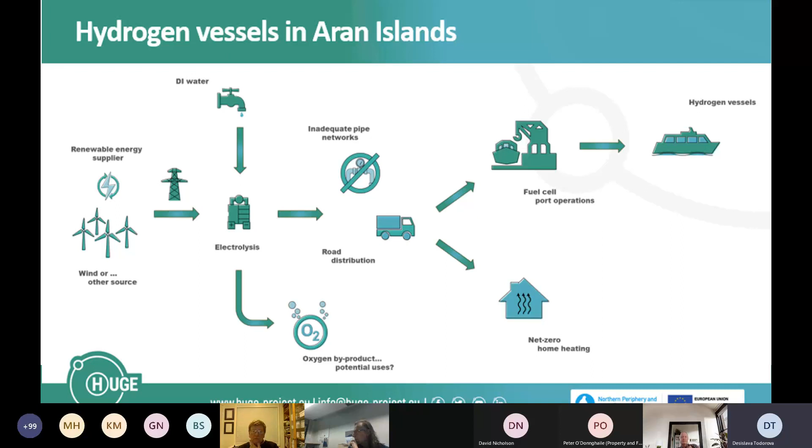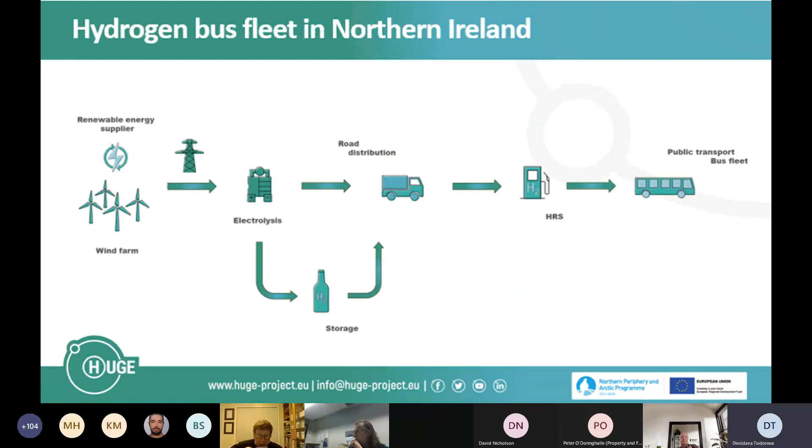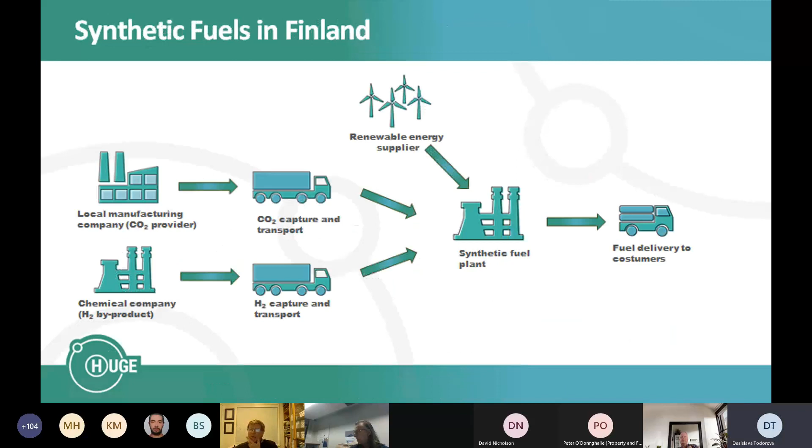So next, I'll just tell you a little bit about the different case studies that we're having in our respective partner regions. We have a case study around hydrogen vessels in the Aran Islands, off the coast of Galway in Ireland. We are exploring the possibility of a hydrogen truck network in Iceland. In Northern Ireland, we are looking at a hydrogen bus fleet, while in Scotland, we are looking into how to put hydrogen in public buildings across the Highlands and Islands, and more specifically the Highlands, working with the Highland Council. In Finland, we're looking into development of synthetic fuels through hydrogen. And in the Faroe Islands, we're looking for opportunity of developing maritime hydrogen and use of hydrogen in vessels near the shore.

Before we go forward with this, today's webinar is a product of the HUGE platform, which aims to increase the awareness of hydrogen as a viable option for a variety of end uses in the public infrastructure domain, be it housing, transport, or industry. We hope that our webinar series increases the readiness to invest in hydrogen solutions by raising awareness of the benefits that can be delivered by employing a hydrogen economy. At the end of today's webinar, we will present you with an output from the T2, the hydrogen hotspot map.

But before that, we have 3 excellent speakers that will give us an insight of what is happening in Scotland in terms of hydrogen development.

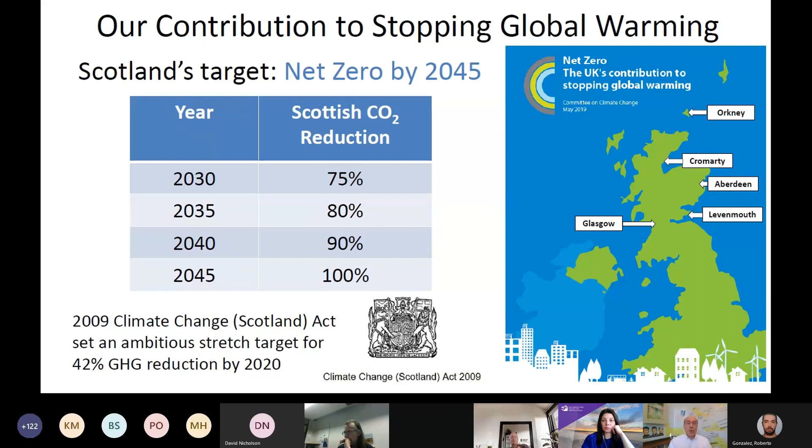They're on the chart here, just on the left. There was a 2020 target, which was for 56% greenhouse gas reduction. Didn't quite hit it. I think it's 52%, but still a massive reduction from the 1990 levels. But the next targets are going to be even more taxing. The 2030 target for a 75% reduction in greenhouse gas emissions is one of the most ambitious I know of. But it's also critical because to achieve the net zero target, we have to deliver the interim targets as well. Next slide, please.

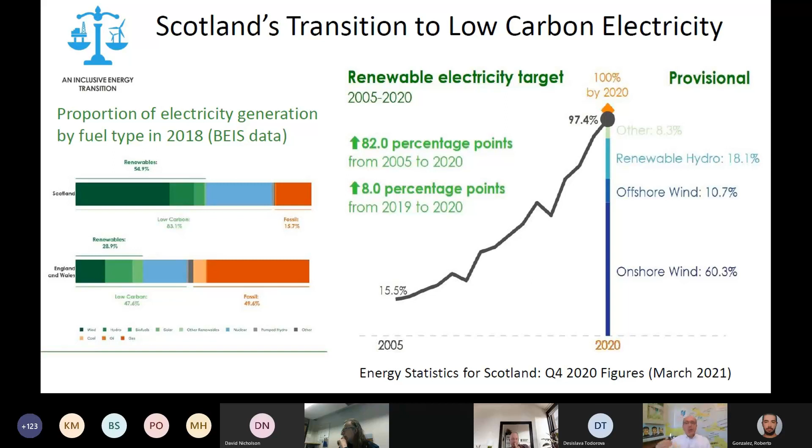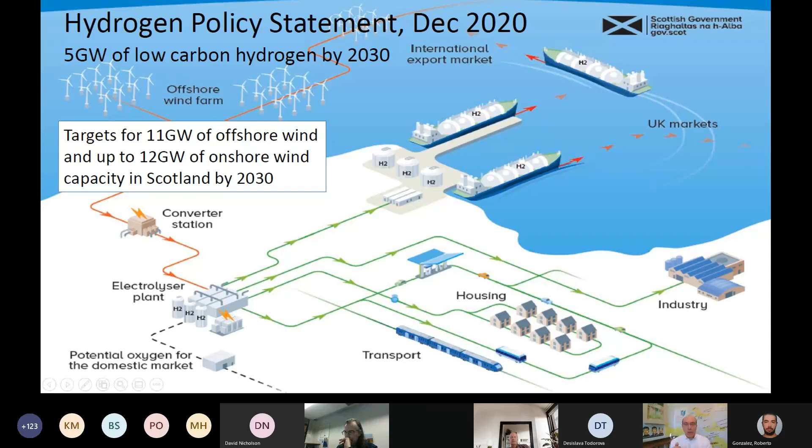So what we have to remember, of course, is that hydrogen, apart from a very few unique occurrences, is not there in nature as a gas field to recover and to use. You have to make it from energy, and typically it's made from the conversion of fossil fuels into hydrogen, or use of renewable energy as renewable electricity or biogas into hydrogen, giving rise to the terms blue hydrogen and green hydrogen.

But the big growth potential for Scotland is the green hydrogen from renewables, and in particular green hydrogen from offshore wind. And here you see some of the activities that are already in place and are moving towards the delivery of that 11 gigawatts by 2030 target, which is being supported by the Deep Wind Cluster. And we'll come back later on to talk about some of the other activities, in particular around ScotWind and where that's taking us. Next slide, please.

So that's the context. We have the target for net zero. We have the interim targets for 2030, etc. So that's where we need to go. The question then is, what part can hydrogen play in delivering these targets, in terms of both the production of clean energy supplies, and also helping to start displacing fossil fuels. So all very well making the clean energy, but you need to find practical ways of displacing the use of fossil fuels in transport and in heat.

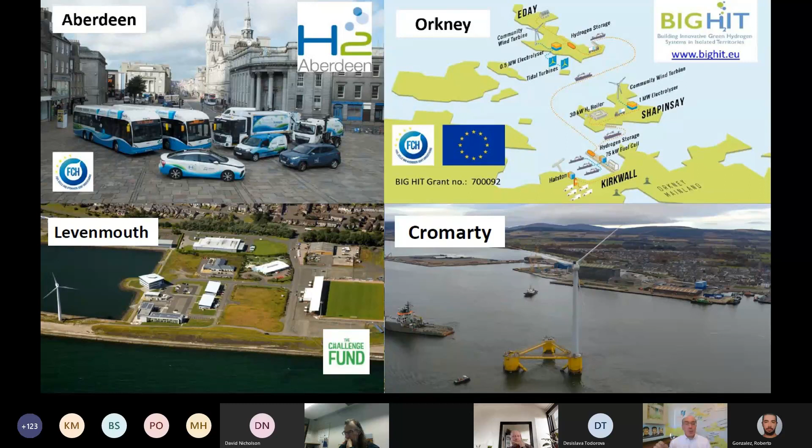So this is where some of the key learning is coming from early projects that are happening around Scotland. I'm just going to take 4 examples of what's happening. There are now many more, but just 4 examples to illustrate this. Next slide, please. So I'd like to start in Methil in Fife. This was actually one of the early locations for hydrogen project development in Scotland. Not the earliest, but one of the early ones.

And what you see in the picture here is the location of the Hydrogen Office, which is just on the dockside in Methil. And this is where some of the early projects happened. So you've got the wind turbine, you've got solar panels, and around there's actually a number of buildings that were used as a test for some of the smart grid and the local production of green hydrogen and the use of hydrogen, for example, for displacing grid electricity. Next slide, please.

But one of the other key activities that's been ongoing for many years in Methil has been outreach and education. The team in the Hydrogen Office were very active in going out doing workshops with local schools, with local colleges. And they estimate that since 2011, they've reached out to about 30,000 pupils and students in Fife region. Fantastic, setting the groundwork for an appreciation of how hydrogen can make a contribution towards the decarbonisation of the energy system. And I'll come back to that, but that is actually critical in some of the next steps in Methil. Next slide, please.

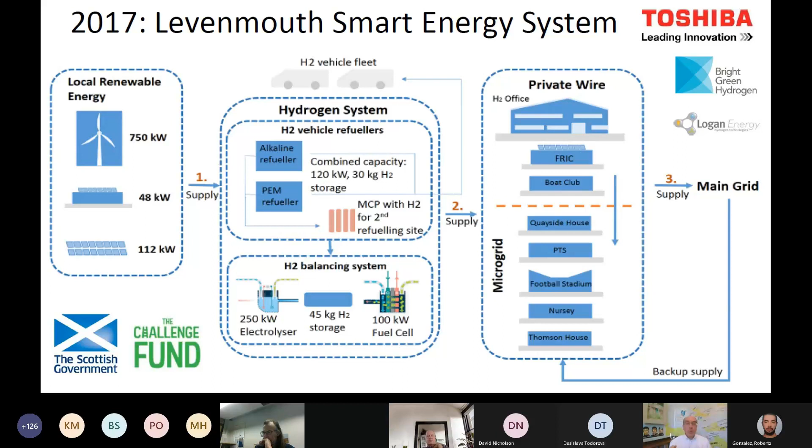And also using the hydrogen for transport. So there was a fleet of vehicles. There were 2 refuse trucks running on hydrogen diesel dual fuel, also transit vans, and Renault Kangoo fuel cell range extended electric vans. So very much a system approach, local energy system approach. But Methil is next going to be the hub for a really important trial. Next slide, please, which is about starting to use renewably produced hydrogen.

So this is a real test, not just of the technology in terms of the production, distribution, and the use of the hydrogen in heating and cooking, but also a big test of, will the consumer be willing to make a change from natural gas to hydrogen, and in this case 100% green hydrogen.

So this is the SGN H100 trial, currently being installed, should be operational next year, and then starting to produce some of this evidence. And the evidence will be critical in terms of, can this same approach then be rolled out on a much wider scale, not just on a few hundred houses, but thousands, or maybe very quickly moving up to city scale. And that will then be an important source of demand for hydrogen, and that will then again be key in the business case for actually starting to scale up hydrogen production across Scotland.

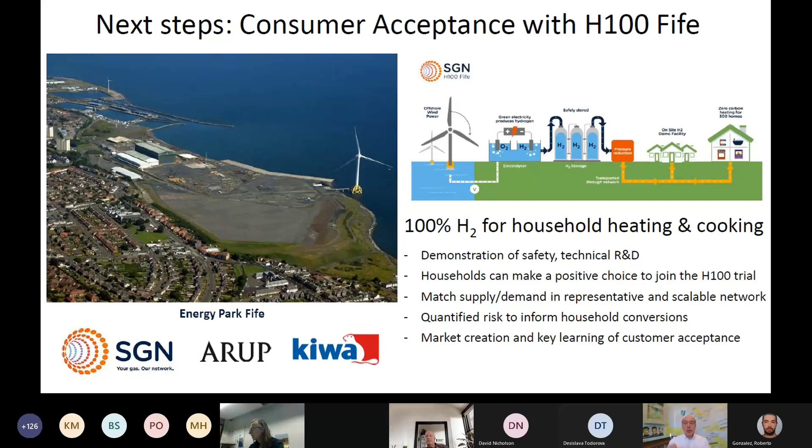Next slide, please. So hopefully in a couple of years' time, I'll be again talking through the stages of progress and activity, and this slide will be very much about using the offshore wind for green hydrogen production and using that for decarbonising typical households, a mixture of shared use properties, semi-detached, detached properties, flats, a big range of houses actually being considered for this trial in Methil, an important key trial, not just for Scotland, but for the UK.

Next slide, please. So, in terms of the question that's just popped up, who pays for replacing the new boilers and cookers? Well, that is all covered as part of the trial. So the attraction is that the resident doesn't have to pay for the hardware. The hardware is being supplied as part of the trial. So 300 households are part of this trial in Methil.

So moving up the East Coast to Aberdeen. Aberdeen, traditionally known as the oil and gas capital of Europe, now the energy capital, and they're doing a lot to decarbonise the energy system. Next slide, please. The big success over the past few years in Aberdeen has been to build up the transport fleet. This picture was taken in 2019 when they had about 65 plus vehicles, single-decker buses, refuse collection vans, smaller vans, Renault Kangoos, cars, Toyota Mirai, the Hyundai, and using the locally produced hydrogen to decarbonise the fleet and to reduce emissions, improve air quality.

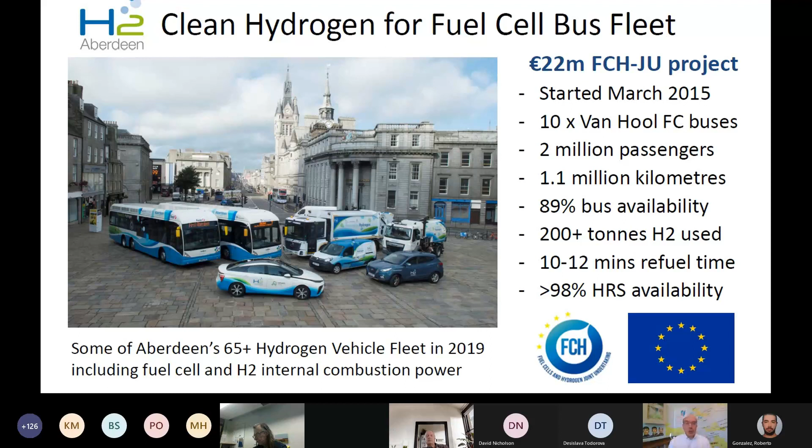Next slide, please. And the project with the buses has built up. They've now brought in a fleet of new double-decker buses, so gone from the single-deckers to double-deckers. These are actually the Wright buses from Northern Ireland. I think there's now 25 of these in regular operation. So, for example, the route going out to the west of Aberdeen, Cults, Peterculter, if you travel on that route, the chances are it will be a hydrogen bus that you'll be using.

And the feedback's been very positive, nice and quiet and comfortable. People prefer them to the diesel buses. And the price of the buses is coming down. The price of the hydrogen fuel, that needs a bit more work to get that to be truly cost competitive, but going in the right direction.

Next slide, please. And a recent announcement, late '21, was about the Aberdeen Hydrogen Hub. So that is really now starting to look to scale up. And BP, as a long-term employer in Aberdeen, picked 2 locations worldwide for this approach. One was Aberdeen, the other was Houston. Next slide, please.

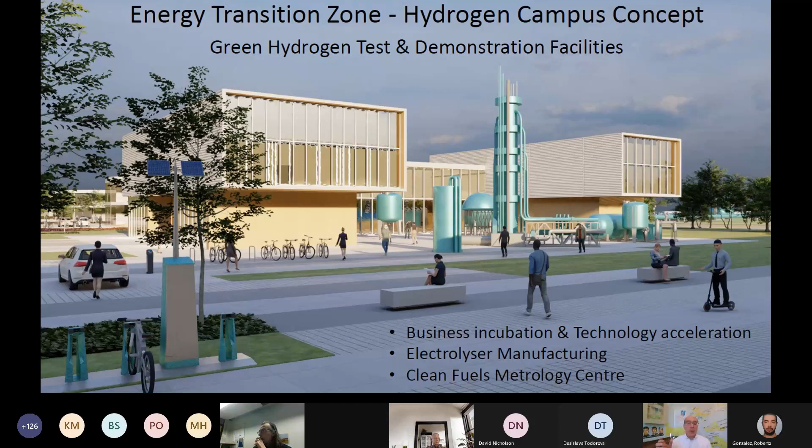And also in Aberdeen, there's a lot of work going on around developing the green hydrogen test and demonstration facilities. This is part of the Energy Transition Zone, so it's taking skills from the oil and gas sector and seeing how these can be used for the green hydrogen and renewables approach. So this is a project still underway, and if it's something of interest, please do get in touch with the Energy Transition Zone. They are looking to shape the activities at the moment in terms of what this will be doing. Next slide, please.

And I've mentioned the renewables in terms of the source of hydrogen. There is also blue hydrogen being considered. So just north of Aberdeen, St Fergus, is a project, the Acorn Hydrogen Project, the Acorn CCS project. You need both. You need hydrogen production, and you also need the carbon capture and storage if you're going to use natural gas for blue hydrogen production. So this is currently underway.

It's on the UK government's reserve list in terms of projects to support. And potentially this could give us one of the ways of quickly scaling up the level of hydrogen production. So starting to get infrastructure, supply, and the corresponding demand in place. Next slide, please.

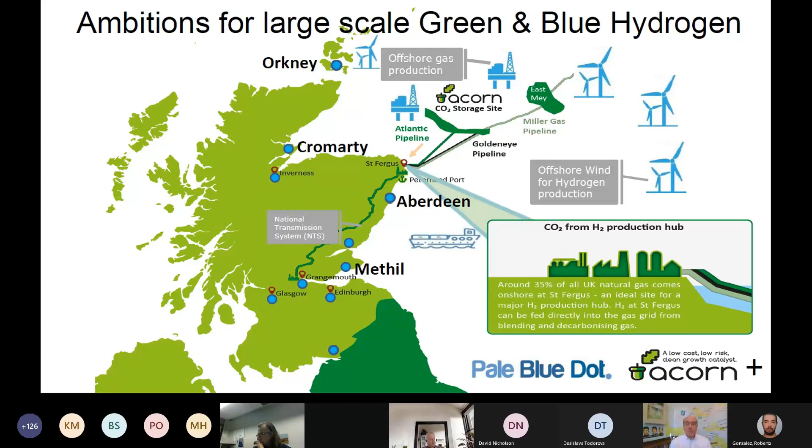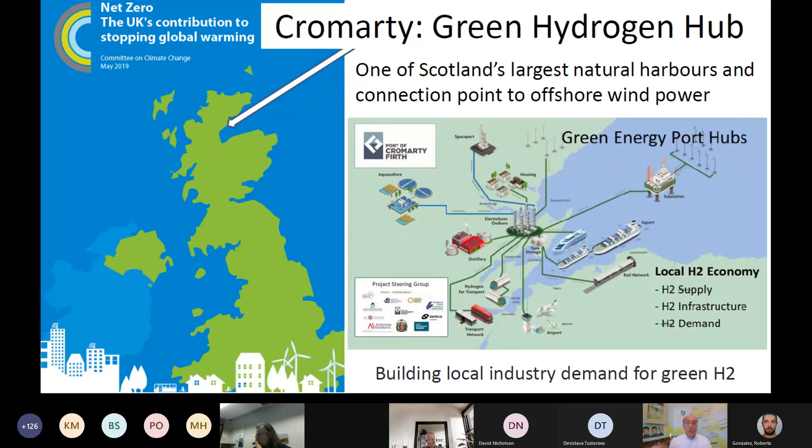So also very much looking at the hydrogen hub approach is Cromarty. Some fantastic work going on there. This is very much about building up local industry demand for green hydrogen, and also the production and potentially the import and export of green hydrogen. Next slide, please.

And just up the coast in Invergordon, for example, there is the distillery, and not just one distillery, several distilleries, very interested in the use of hydrogen to actually decarbonize their processes. So it's not just governments that have targets for net zero. There's also a number of industry sectors which are starting to set the targets. So the whisky sector is one. The water utilities is another. Next slide, please.

And the work at Port of Cromarty Firth also recognises that you need to have early supply of hydrogen to scale things up.

Just realised, I've just been told my battery is going low. Is it my battery or is it the other screen?

My apologies. So import and export of green hydrogen for Port of Cromarty Firth, and that could be key in an early scale up. Next slide, please. And here is just a snapshot of the activities going on around the area. So again, this comes back to the key message. If you're going to start scaling up production, you need to scale up the demand and the infrastructure to fit with that. So the hydrogen economy doesn't just happen by scaling up production. You need everything to happen to actually make it work.

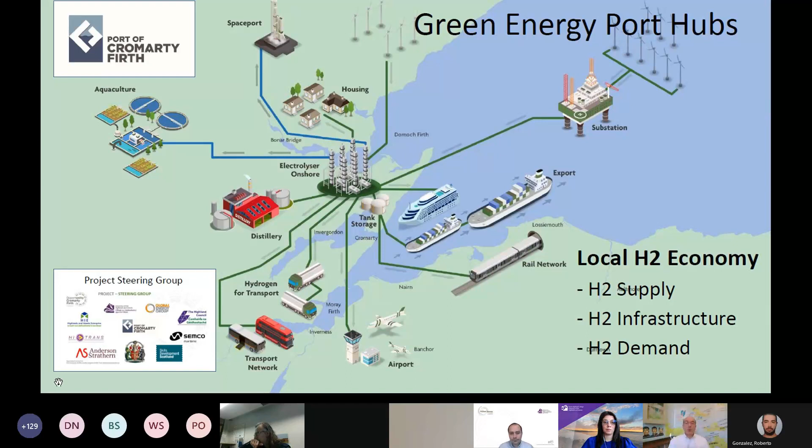Next slide, please. And a good example of that is happening in Orkney. For the past 7 or 8 years, they've been developing hydrogen production and hydrogen demand as what is called either a hydrogen territory or a hydrogen valley, or in the current consultation with the draft hydrogen action plan, a hydrogen hub.

Next slide, please. This was very much about starting to use some of the surplus renewables, renewable electricity, which was being constrained off the grid because the demand for electricity wasn't matching the supply, and using hydrogen to actually store some of that extra energy and move it around and use it in different applications. So the electrolyzers on Eday and then Shapinsay are able to produce and supply green hydrogen into Kirkwall.

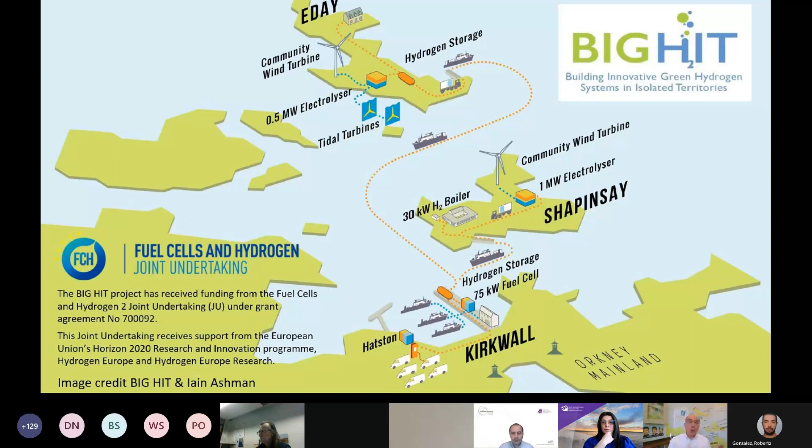Next slide, please, where the hydrogen can be used for a variety of applications. Some of it is being used in the blue box on the left. That contains a fuel cell that can provide power to the ships when they're in harbour. The vans are hydrogen fuel cell range extended vans, but there's a lot more also starting to happen in Orkney.

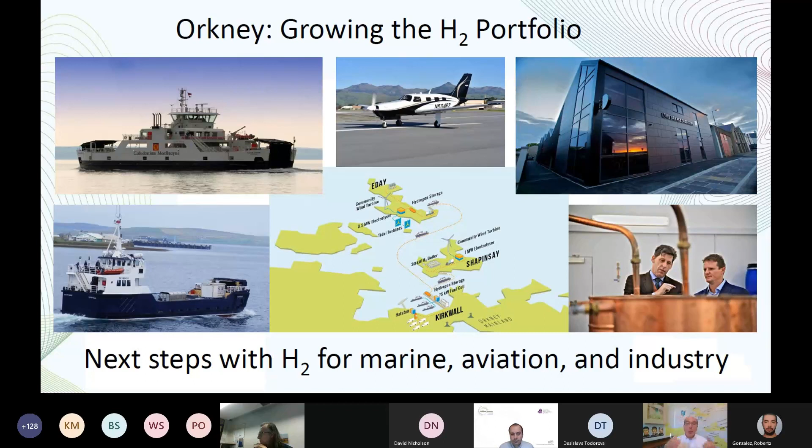Next slide, please. And building on projects like Surf 'n' Turf and BIG HIT, there's been further projects around feasibility studies for decarbonising the Orkney distillery, conversion of ferry auxiliary power to hydrogen, a project to actually produce the first hydrogen fuel cell ferry, the HySeas III project, and further projects around decarbonisation of aviation. Next slide, please.

So some of this is involving test flights of single engine planes, but going towards twin engine planes, such as the Britten-Norman Islander. Project Fresson is looking to have flight trials this year, and this was the same type of plane as is used on Orkney for some of the inter-island flights.

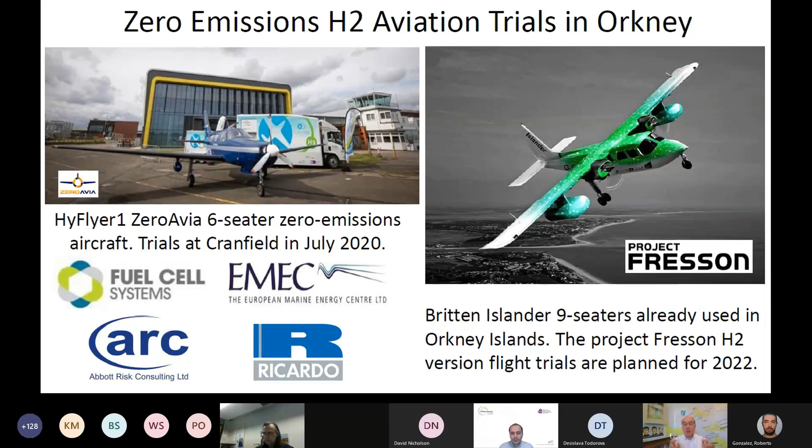Next slide, please. And the Kirkwall Airport is one of the areas that is seen as a sustainable aviation test hub. On the tarmac is actually a Britten-Norman Islander. It's not a fuel cell hydrogen version yet, but hopefully not too long before that actually happens. And the airport also has a project to have a hydrogen genset producing electricity for the airport, allowing the airport to have heat and power from a very sustainable supply of green hydrogen produced locally in Orkney.

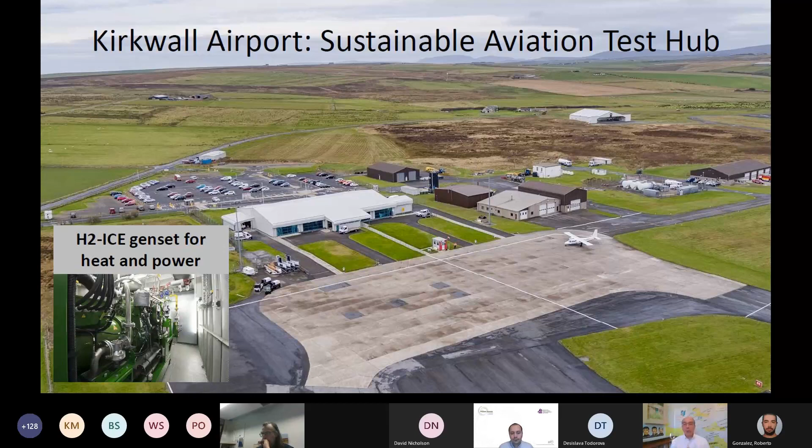Next slide, please. But where does it go next? And this is where we really start to look at scaling up. So next slide, please. Several projects are being developed across Scotland. One of these is the Flotta Hydrogen Hub. And the proposal here is using up to 2 gigawatts of offshore wind from one of the ScotWind lease sites to produce green hydrogen. This could be in operation by the late 2020s.

And the key thing here is Flotta is an existing facility. It's used for oil storage. So it's very much around starting to use some of the existing oil and gas assets for conversion to very large scale use of renewables for green hydrogen production, and then potentially that green hydrogen for conversion into other products. It could be methanol, it could be ammonia, or it could be exported as hydrogen into adjacent markets.

Next slide, please. But it's not just the Flotta Hydrogen Hub. You'll probably hear a bit later about the Orion project, so I'm not going to say much more about this, apart from similar approach, taking existing oil and gas assets and starting to see how these can be converted into future assets for sustainable energy production, storage, distribution, export.

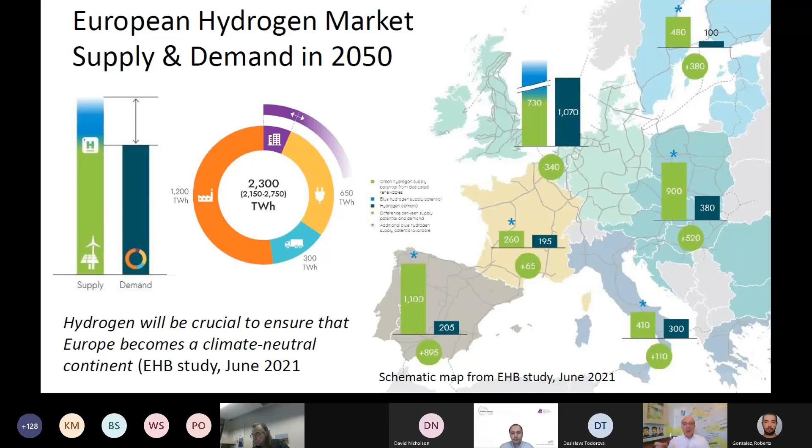Next slide, please. Just to wrap up, this is all looking very promising, but we have to remember that we still need to make sure that we build on the experience as we scale up. We can't go from zero to hero in just one step. It's a very staged process. We need to have all of the people working on this, and if we do this right, we will deliver net zero, but we'll also deliver some massive benefits to Scotland, economic, employment, and many others as well.

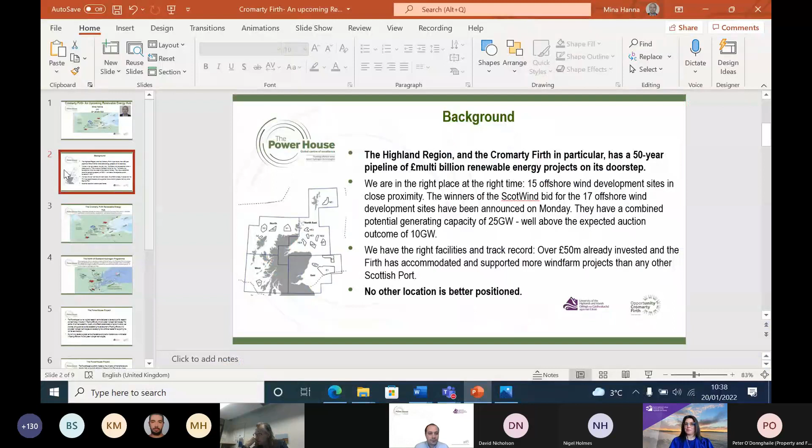Today, I will be speaking about the Cromarty Firth, the upcoming renewable energy hub, and I will speak briefly about the 3 projects which are currently being prioritized by Opportunity Cromarty Firth. A little bit of background information: the Highland and the Cromarty Firth in particular has over a 50-year pipeline of multi-billion renewable energy projects on its doorstep. We believe we are in the right place at the right time.

So there are 15 offshore wind development sites in close proximity to the Cromarty Firth area, and the winners of the ScotWind bid for the 17 offshore wind development sites were announced on Monday. A combined potential generation capacity of 25 gigawatts, which is well above the expected auction outcome of 10 gigawatts that had been initially predicted for ScotWind.

We have the right facilities and track record at the Cromarty Firth. Over £50 million has already been invested in the Firth, and the Cromarty Firth has accommodated more wind farms and other projects than any other Scottish port. So we believe we are in the right location, and there is no other location better positioned to apply for this.

There are a number of projects that have been prioritized by Opportunity Cromarty Firth. Opportunity Cromarty Firth is a consortium of several partnerships of organizations. We have UHI, we have Global Energy Group, and a number of other academic and industrial organizations, looking at the opportunity to have Port Cromarty Firth as a free trade zone, as a free port, which will attract inward investment and significant economic activities to the region.

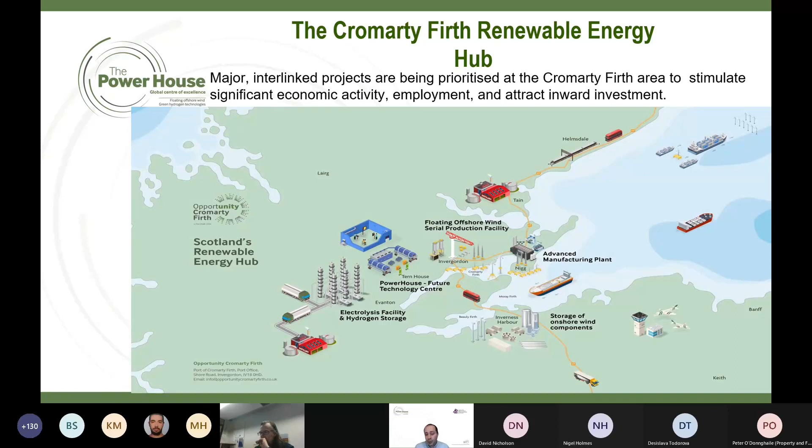The major interlinked projects currently being prioritized at the Cromarty Firth area are the powerhouse, the R&D educational and skills development facility. We have the North of Scotland hydrogen program. We have the advanced manufacturing plant at Nigg Bay, and these are the main 3 projects I will be speaking about today. The aims of these projects are to stimulate significant economic activity in the region and in the UK, create employment opportunities and attract inward investment. And we're looking at export opportunities as well from these projects.

The first project, which Nigel has spoken about briefly, is the North of Scotland hydrogen program. With this program, we aim to develop a state-of-the-art hub in the Cromarty Firth to produce, store and distribute green hydrogen at scale to the region and other parts of the world. So we're looking at a 35 megawatt onshore electrolyzer facility. The main electrolyzer is expected to be operational by early 2024. The feasibility study for that project has been concluded, and currently we are in the concept selection phase.

Mainly this onshore electrolyzer would provide green hydrogen, and we're solely speaking about green hydrogen, to the main distilleries around: Glenmorangie, Whyte & Mackay, and Diageo as well. The distilleries will have green hydrogen produced from the onshore electrolyzer to replace the fossil fuels used in their operations and facilities, in a bid to reach net zero and reduce their carbon footprint.

So the production capacity of that electrolyzer is expected to be around 14 tons of green hydrogen per day. And that's a huge capacity. That's going to be one of the biggest electrolyzers, not only in Scotland, but in the UK and in Europe. Hydrogen is expected to be used as well for local transport, something very similar to the Aberdeen buses, which are running on hydrogen.

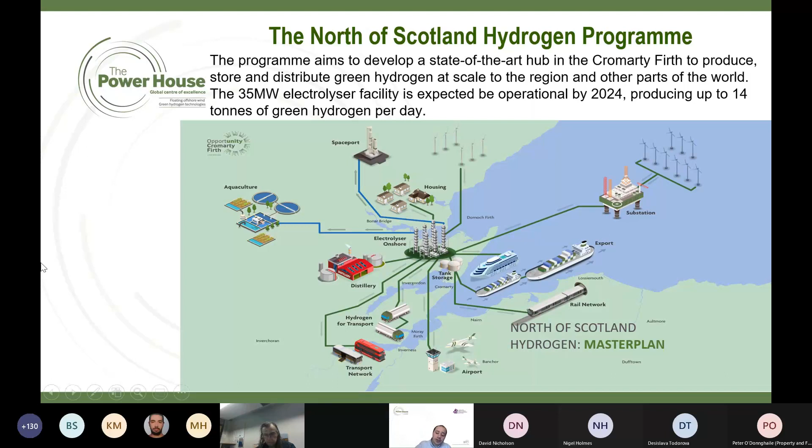The second project I will be speaking about is the Powerhouse project. So the Powerhouse is a new applied research center dedicated to developing skills, R&D and innovation in floating offshore wind and green hydrogen technologies. The center will connect academia, industry and different stakeholders to inspire innovation and set priorities in a specific niche market, which is the floating offshore wind and green hydrogen.

The other aspect of the center is developing the workforce needed for supporting the UK net zero transition. So we're looking at developing courses and delivering courses in partnership with other major training providers, as well as through the other colleges and universities, the academic universities we have.

So we have a Powerhouse working group, which has over 70 members representing more than 35 different academic, industrial organizations and third sector organizations, including training departments. So our aim is to develop a global center of excellence and position Scotland as a world leader in floating offshore wind and green hydrogen technologies. The Powerhouse is currently hosted by the University of the Highlands and Islands North Highland College building at Teaninich in Alness. That's the current location of the Powerhouse.

The first joint research project has been secured for the Powerhouse, so we're currently working on the development of an ammonia fuel cell for different maritime applications. So we're speaking about providing shore-to-ship berthing power, and we're providing maritime propulsion as well with the ammonia fuel cell that is currently being developed.

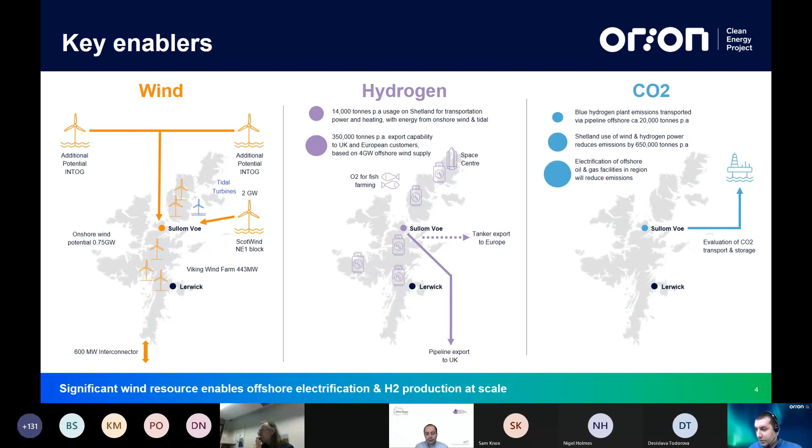And then one of the key benefits we have here is a capable supply chain that's been servicing the oil and gas industry and the marine industry for the past 50 years. And we do actually have hydrogen expertise that's been on Shetland for just under 20 years, assisting in the development of hydrogen projects around the world. So that company is Pure Energy Centre, and they've done some key pieces of work for the Orion team in terms of developing our projects. But we do have hydrogen expertise that has been well established on Shetland.

We also have expertise relating to renewable energy. So we do have some wind farms on Shetland at the smaller scales, and they're looking to develop their businesses. And I suppose that's one of the challenges we face, is how do these small scale projects link into the larger scale interest that we clearly have in Shetland. I've mentioned Aker Wind, Cerulean Wind, looking at gigawatt scales. We've got one of the largest wind farms being developed by SSE, but we've got other big companies such as Statkraft who are looking to develop renewable energy projects in Shetland.

So one of the key questions we have, and it's maybe an item for discussion later, is how do these small scale opportunities fit into the larger scale opportunities, and how do both ends of that benefit? How does the community benefit? How can we have community scale projects working alongside larger scale projects as well?

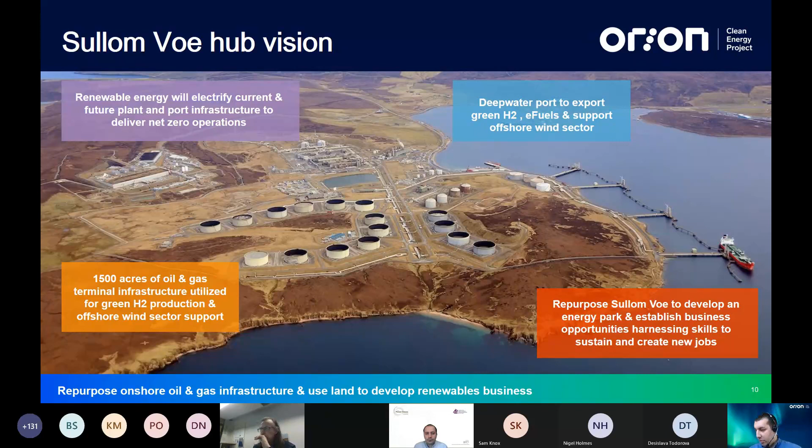And just a final point on this one is we're keen to ensure we're making the most out of brownfield rather than greenfield opportunities. This is again the piece of trying to reduce the costs as much as possible for any development. So if we make full use of the brownfield opportunities, then there'll be less of a cost in terms of developing greenfield sites and some of the natural beauty we have here in Shetland. So again, we're looking for a balanced solution onshore and offshore.

And I think we've identified that the marine industry is going to be one of the biggest demands for future fuels. And I'll speak about the Neptune projects later on, which is a project looking at the marine industry in Shetland and how that could satisfy demand for hydrogen, but also there's a potential to use battery technology there as well.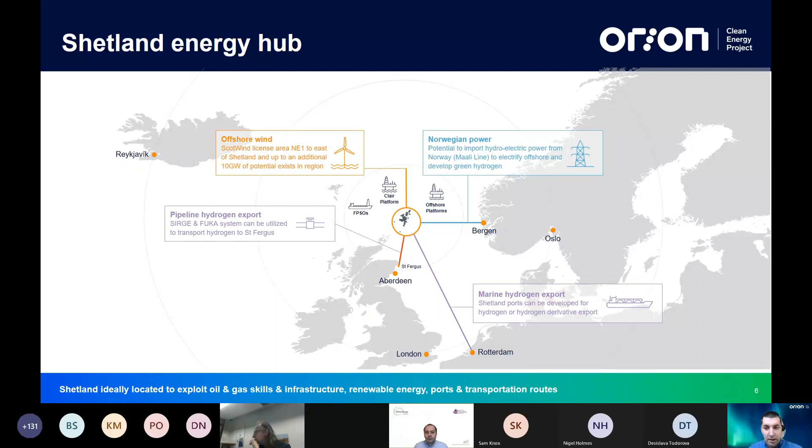We're located close to up to 50 oil and gas facilities. They need to be decarbonised, but also we can repurpose oil and gas infrastructure in the service of future renewable energy, such as hydrogen. And we're connected via pipeline to St Fergus, so we can be connected into the projects there as well.

And just an idea of the capacity in Shetland. So we've got a 600 megawatt interconnector being developed, and it'll be ready by 2024 to connect us to the mainland grid for the first time. And as you can see from the Viking wind farm that's being built at the moment and other wind farms in development, we're going to be close to being at capacity and constrained again. So we're looking at the opportunity of alternative products for these wind developments onshore and offshore that would address some of the challenges with constrained wind in Shetland.

And I've mentioned wind, but we also have tidal capacity here in Shetland at just below a megawatt, and that's looking to hopefully expand in the future. So we have tidal energy operational in Shetland, and hopefully we can get that developed at larger scales moving into the future, and perhaps to the service of the hydrogen industry.

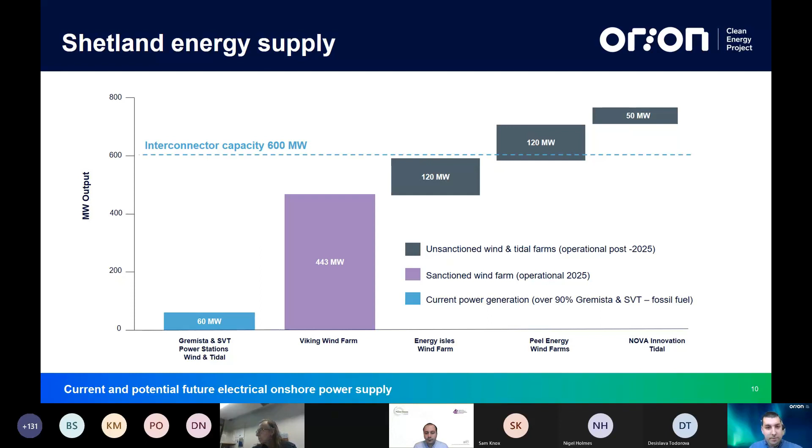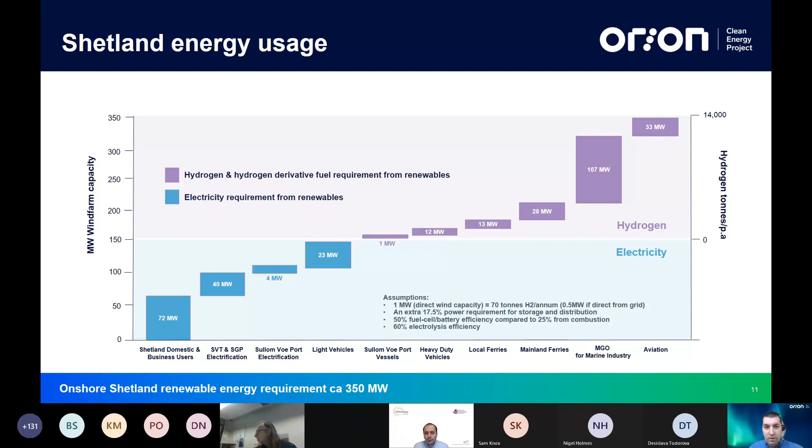So just to re-emphasize, we're definitely looking to be net exporters of products, and that's electrons and molecules, whatever form that takes, whether it's synthetic fuels such as methanol, ammonia, and anything else that's in the energy mix in the future.

This is just some of the carbon emissions we're looking to reduce, and associated to this, I'll mention one of the key pieces of work the council is doing at the moment, led by Ricardo. It's looking at the base analysis of carbon emissions for different areas around Scotland, but we've identified that Shetland is a very different picture to other local authorities.

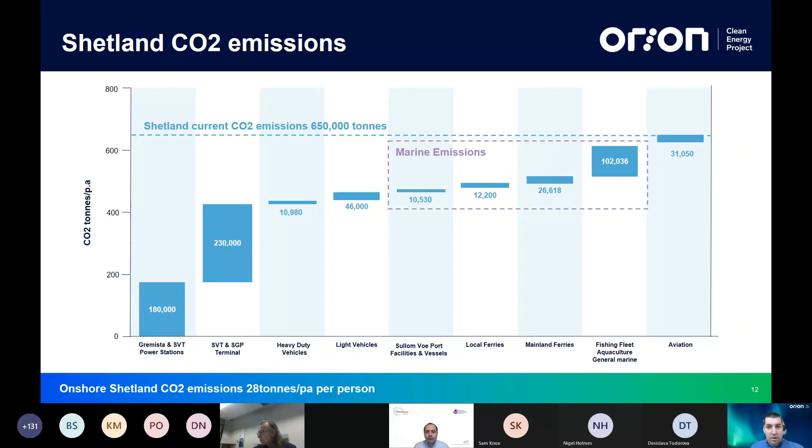For instance, the council operates 12 inter-island ferries. We have a marine industry that's not necessarily in the scope of the BEIS data that we're presented with at the moment. So we're trying to produce a net zero route map that addresses the scope of carbon emissions from Shetland properly.

Now, just to give a list of some of the activities at the moment, we've recently almost completed a techno-economic screening study, and that's looking at all the opportunities I've spoken about so far, such as hydrogen production, carbon capture, and it's trying to phase all those opportunities and provide us with a short list of how we're going to develop these opportunities.

As I've mentioned there, we were involved in an LOHC study along with Cromarty Firth and the Scottish Government. And then the Neptune project, I'll just briefly explain, is looking at the marine industry and trying to produce a map or a model and a tool to inform the transition for the marine industry. Which fuels apply for which applications, for instance, is one of the questions we're answering. Does a fishing vessel use the same fuel as a short-range inter-island ferry?

So that's a project, and we've received £500,000 funding for that to look at what technologies make sense where, and provide a model that could be expanded from the microcosm level of Shetland to maybe a more national picture of how the marine industry can transition ultimately.

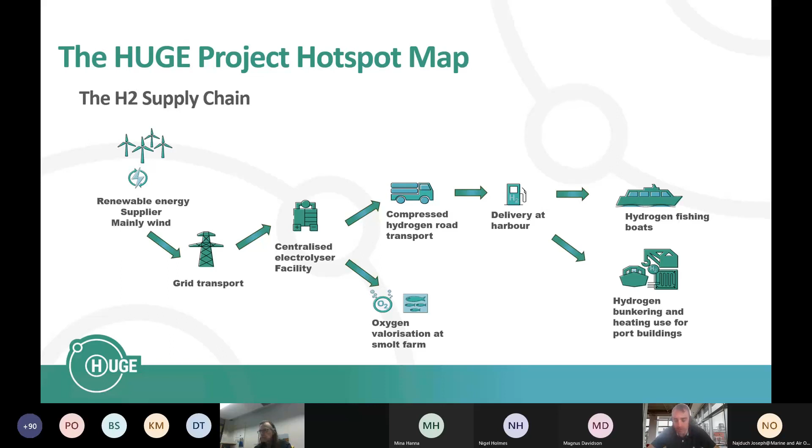So when we set out to create this map, we decided to try and break this supply chain down into 3 key areas based on a review of various pieces of literature, looking at hydrogen strategies that are being developed, and using this as a sort of baseline for the map.

So the first of the 3 areas we picked out was what we've called hydrogen production and supply. And production and supply obviously relates to the early part of the supply chain, where your renewable energy is converted into hydrogen through electrolysis. So some organizations that might fall under this definition would likely include renewable energy generators, the likes of wind farms, solar farms, but also the people who would be building the infrastructure. So the electrolyzer manufacturers, potentially even the renewable energy

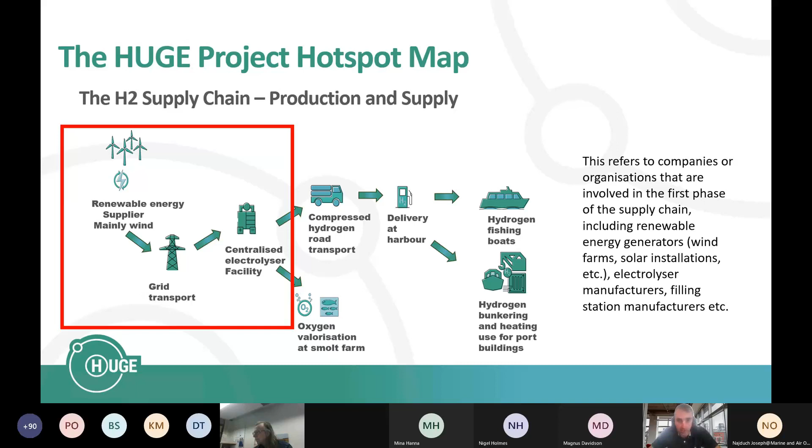manufacturers as well. So using the example here, the part that fell under this would be the wind farm. And of course, whoever was producing or providing the electrolyzer.

Then moving along the supply chain, the next area that we identified was transport and storage. So again, this obviously refers to companies or organizations that are involved in the movement of hydrogen from one location to another. So most commonly that would be from where the energy was produced to where it's going to be used. So again, in this example, it would be compressing it into bottles, putting it into a truck or lorry and transporting it from where it was produced down to the final locations where it's going to be used. But other examples might be companies that arrange or install pipelines, and things like that.

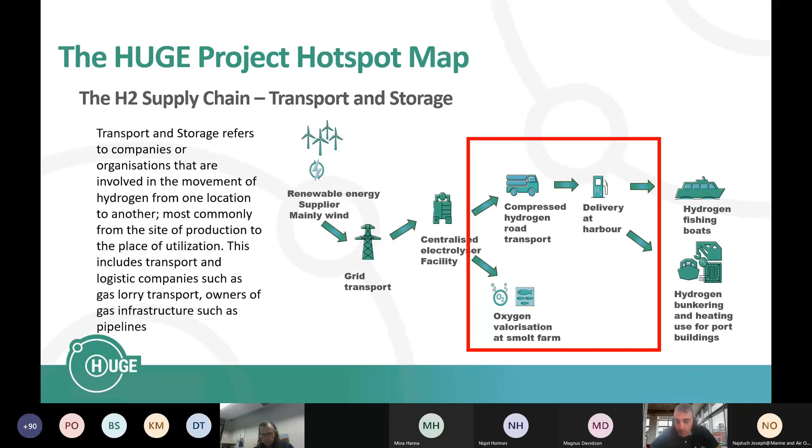And then the final part of the supply chain that we identified was utilization. And again, it's hopefully fairly self-explanatory. That refers to where the hydrogen gas is utilized. So it would likely include things like filling stations, grid injection sites, heating grids, or infrastructure along those lines, and the likes of transport operators. So in this example, it would be the company that is using the marine vehicles and running them and organizing all that.

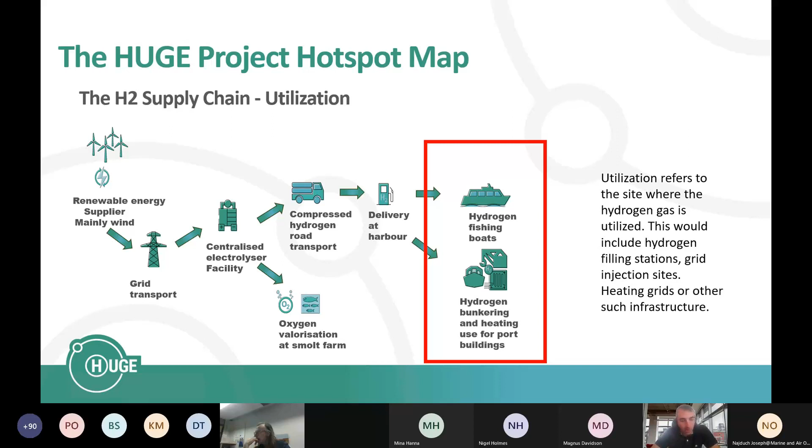So once we'd identified those three key areas, we decided to produce an early version of the map and did a sweep around our various project partners to identify any organizations they could find within their regions that fitted under each of these headings. Once we'd done that, we collated all the information together, fed it into some mapping software and applied a key to it.

So for example, production and supply is represented by a green marker, transport and storage by red markers, purple represents utilization, and the yellow, which you can see there's quite a lot of. We'll cover that a little bit later in the presentation, but this allowed us to put together an early draft of the map, and you could see at that point some trends.

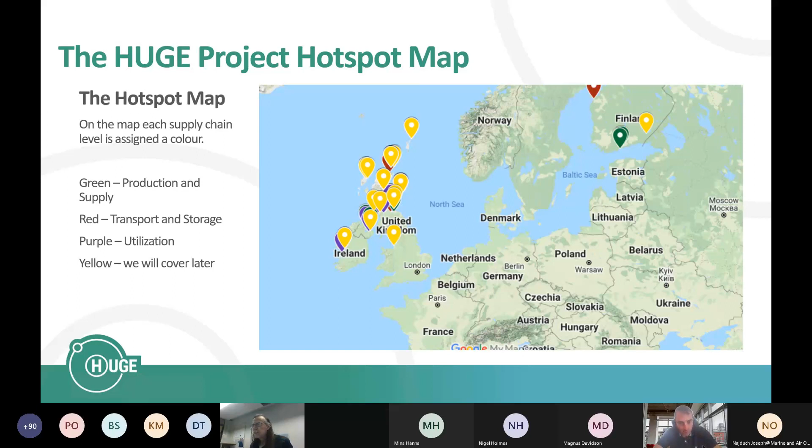As the map has gone on, we've added more and more. Over the course of the project, we've become more aware of different bits and pieces and added further information to this, and the map's growing, and there's more information showing as we go along. As I say, whenever you look around the map, you can start to pick out some trends that allow you to see some ideas of things that are happening.

So you can zoom in a little bit, and as you can see, there's a range of activity across the central belt of Scotland. There's some activity in the northeast of Northern Ireland that stands out, and it's quite interesting to see even at this point some collections like that.

Another thing that this helps us to identify by using the different colors, you can identify, as an example, where there may be either full supply chains or breaks in supply chains. So, for example, you may see that there is a cluster of hydrogen producers but no end use, which might signify that there needs to be some way of connecting those two areas up. So it's just quite interesting to see some of the trends that developed early on in the project.

The next thing that you can do with the map is if you zoom in on the map, each of the different spots is clickable. So you can zoom in, go right in and see where something's located, click on it, and you can see some information. So for this example, it's one of the production and supply organizations identified. In this case, again, it's a wind farm in Northern Ireland. It just gives a brief description and links to the organization's website. You can go in and get further information.

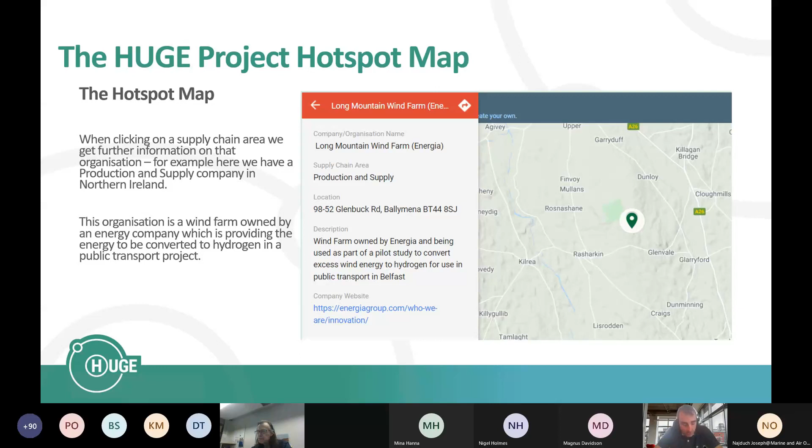As I alluded to earlier on, there's a lot of yellow markers across the map, and at this point, the main thing that we could see when we were looking at the map was there was a lot of stuff to do with this particular color. So the yellow markers refer to organizations carrying out research into hydrogen power and fuels. And at this point, we can see that this is by far the most prominent item on the map, which to me shows that there's a massive amount of interest and research going on, but it's how we can take that to the next stage.

So it's really important, I think, that we're able to see that that's what's happening and to see how much activity there is. And it also gives us a bit of confidence that there's a lot of interest, and we're focused on our particular project, but it's nice to see that there's other people out there trying to do similar things or different things, and it's really driving forward the work in the hydrogen sphere.

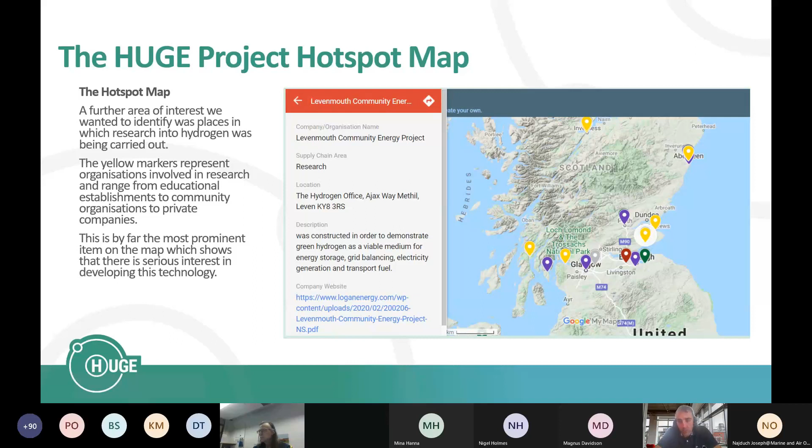And then just moving on, finally, this is really the final slide at this point. The map is now live on the project website. We are producing a report as we go along to note how things have changed as time has gone on. But there's been a massive evolution from some of the early versions. Early on, we could see there were a lot of spots around places, but there didn't seem to be much connection. But now there's a lot more. We can see more and more activity being added.

But obviously, we're kind of constrained as a company and as a project where we're maybe aware of some of the things that are going on, but we don't have a wider knowledge. And that's where hopefully we can key into some of the knowledge that's available in people that are here today. So we've created a contact page on the website just below the map. The map's live on the website, and I'll pop the link up to it on the final slide. But it just means that any organization that wants to be included on the map can submit their own information, and that would be of great help to us.

Obviously, it would help us to see some information and get a bit more of an idea of what's happening. It would help the map evolve a bit further, and again, we can compare that to what was happening 6 months ago, a year ago, and hopefully show that things are growing and evolution is happening, and there's more and more interest in hydrogen.